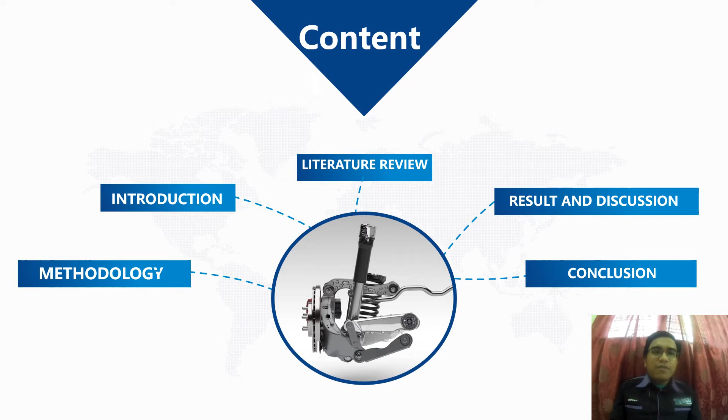For chapter 1, we will look into the introduction for this project. The suspension system is basically a system that includes tire air pressure levels, springs, shock absorbers, and all the components that connect a vehicle to its wheels that allow the car to move.

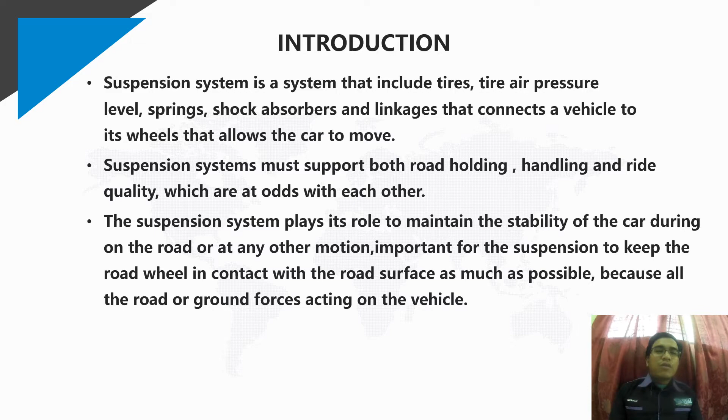The suspension system also plays its role to support road holding, handling, and ride quality, each of which is at odds with the others. The suspension system is also important to maintain the stability of the car during motion on the road, keeping the car in contact with the road surface as much as possible.

Problem statement: the components' condition and functionality of the vehicle suspension system is crucial to achieve sustained comfortability and steering stability during driving. The performability of the suspension system depends on various mechanical parameters as well as human factors. The aim of this research is to investigate external mechanical parameters such as tire pressure, tire width, and load distribution, which could affect the performance of the suspension system.

This research will also help to identify the ideal parameter settings in order to obtain optimal performance of the vehicle suspension system.

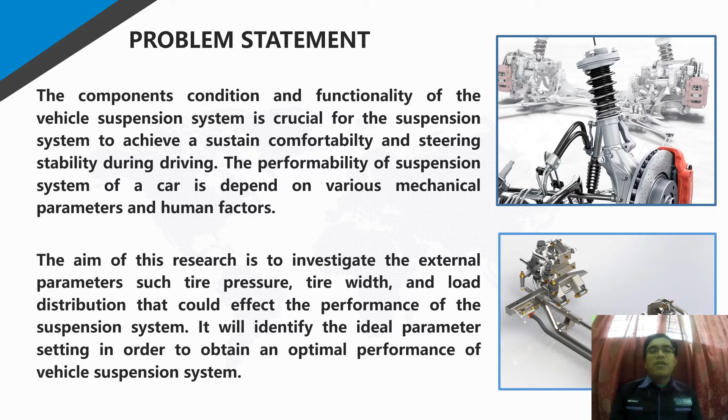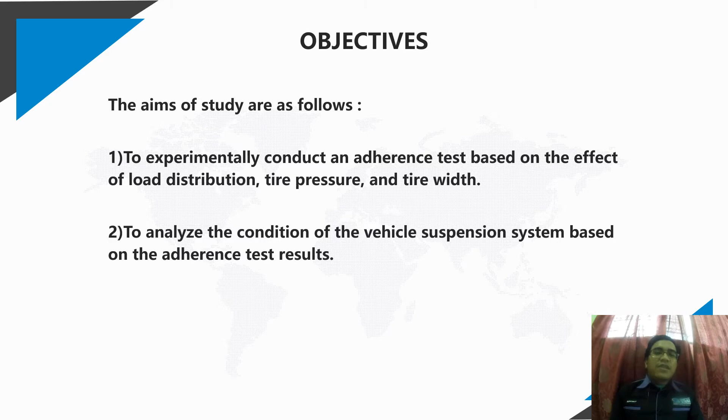The objectives of this research are as follows: first, to experimentally conduct an adherence test based on the effect of load distribution, tire pressure, and tire width; second, to analyze the condition of the vehicle suspension system based on the adherence test results.

The scope of study for this experiment is to focus on conducting the adherence test, considering several parameters involved regarding the vehicle suspension system. This study also focuses on finding the ideal condition and setting in order for the suspension system to perform maximally and with integrated performability.

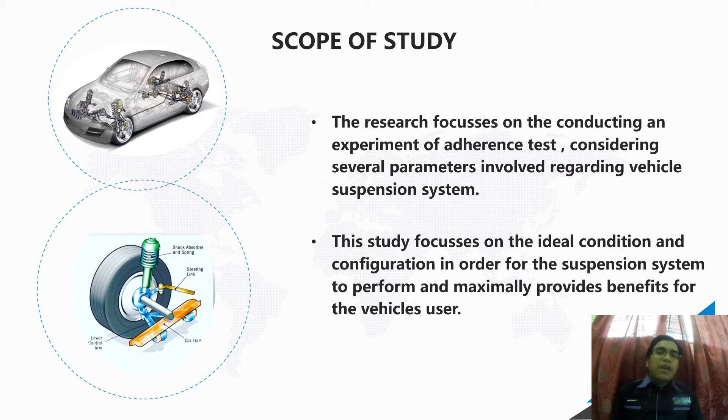Next, we will look into chapter 2. In 2018, Toma conducted a study on the influence of tire pressure on braking performance and the vehicle suspension system. The experiment was carried out using a few sets of numerical data of tire inflation pressure.

The experiment was carried out using a few sets of numerical data of tire inflation pressure. The findings show that tire pressure does affect the suspension ability, creating errors that influence the rolling resistance of the vehicle.

It was also found that tire inflation pressure majorly affects the vehicle's dynamic behavior, which also affects passenger comfortability and can define the tire's reliability. The experiment also gave a result showing rolling resistance as tire inflation increases and pressure decreases. The findings show that implementing a lower level of tire inflation pressure can be considered dangerous.

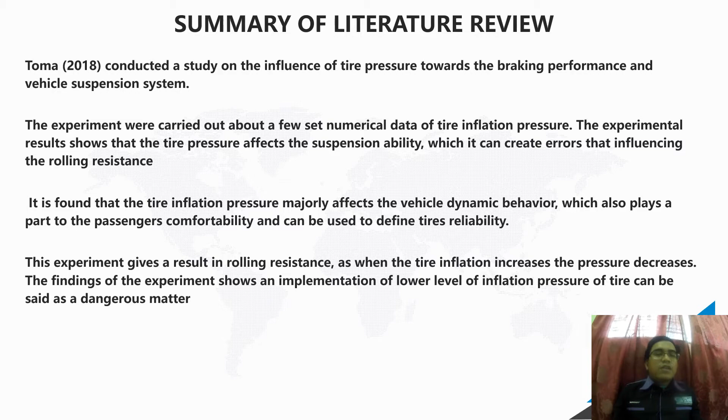Another research was conducted by Hamed et al. in 2010, which states that incorrect inflation of tire pressure influences vehicle handling, passenger comfortability, and braking condition. It is also claimed that the inflation tire pressure being affected contributes to the reduction of fuel efficiency and tire lifespan.

They carried out the experiment using a mathematical model and experimental validation. A 7 degree of freedom model was developed using MATLAB for a full car model system. The experiment was done with different settings of tire inflation pressure, and analysis was carried out for each case regarding the performance of suspension.

Some of the parameters highlighted in this study were road handling, ride comfort, and the stability of the vehicle in terms of the vehicle suspension system. From the experiment, the results show that under-inflated tires do also affect the suspension system performance.

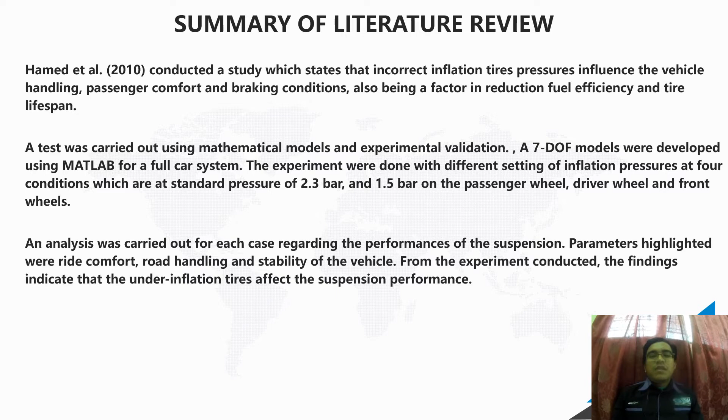Next, we will look into chapter 3 about the methodology of the suspension system.

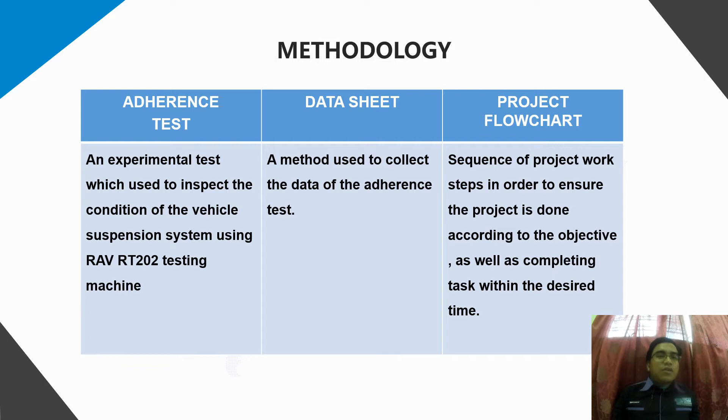In this project we have three methodologies. The first one is an adherence test, an experiment used to inspect the condition of the vehicle suspension system using the RAV RT202 adherence testing machine. Second, we have a data sheet used to collect the adherence testing data. Last, we have the project flow chart, which shows the sequence of project work to ensure the project is done according to the objective and within the targeted time.

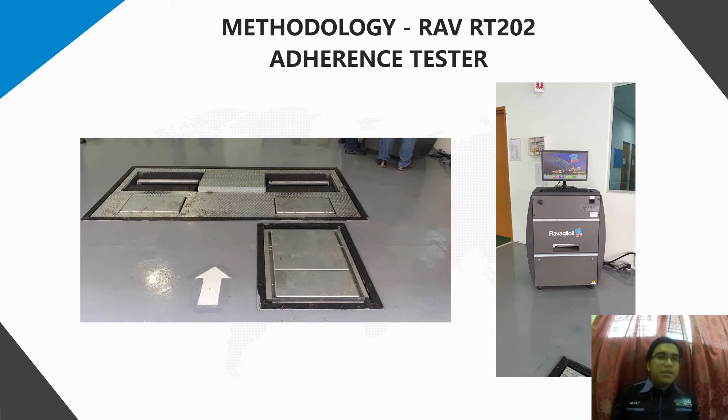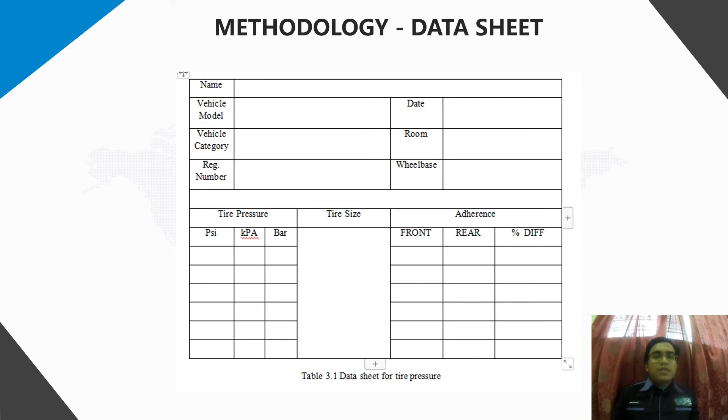So chapter 4, we will look into the result and discussion for this experiment. But first, we will look into the concept of adherence. The value of adherence generated by the test will show the current condition of the suspension system.

If the adherence value obtained from the test is 60% or above, the condition of the suspension system is good. If the adherence value is between 20 to 60%, the condition of the suspension system is considered acceptable. If the adherence value is below 20%, the suspension system needs to be checked, as it is below standard, or the condition of the suspension system may be poor for that part of the car.

This measurement of adherence is measured on a certain part of the car, for instance, the front right wheel of the car.

Next, we will look into the value of adherence difference. The adherence difference is compared between the left side and the right side of a particular axle of the car.

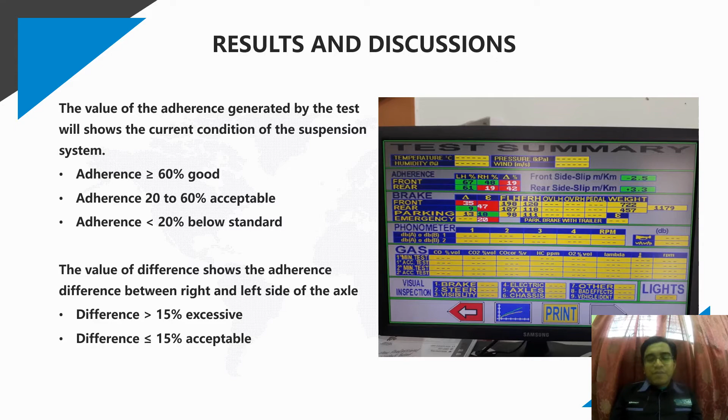Next, we will look into the result and discussion for the load distribution parameter. We have a few different conditions here, and for each condition we measure the front axle weight, rear axle weight, and total weight, then convert the data into a column chart.

From this column chart, we can see the increasing number of passengers mostly contributes to the rear axle weight of the car. The front axle weight is also affected by the increasing number of passengers, but it only shows a small difference in increasing front axle weight.

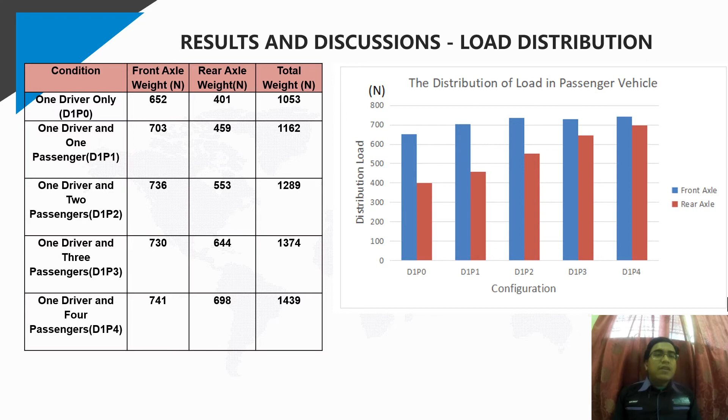Next, we will look into the load distribution that affects the adherence difference. From this graph we can see the adherence difference does increase with the increasing number of load. However, the increasing load did not affect the condition of the suspension system.

This is indicated by the data, in which none of the data measured exceeded the error limit. The error limit is basically the 15% I mentioned before, where the adherence difference must not exceed 15%, or the suspension system will be considered in poor condition.

So here we can see the increasing weight does increase the adherence difference of the axle, but did not affect the condition of the suspension system.

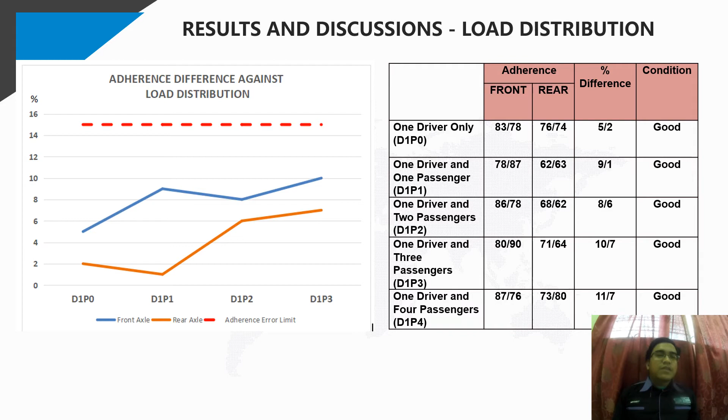Next we will look into the tire pressure results. Here we have a few different conditions of the tire pressure: severely underinflated, moderate underinflated, optimum inflated, moderate overinflated, and severely overinflated.

From the graph, we can see the suspension condition is good when the condition is underinflated or optimum inflated. However, the suspension condition is poor when the tire pressure is overinflated.

Here we can see the suspension system is in poor condition as it exceeds the adherence error limit. So the suspension system is indeed affected by the tire pressure setting.

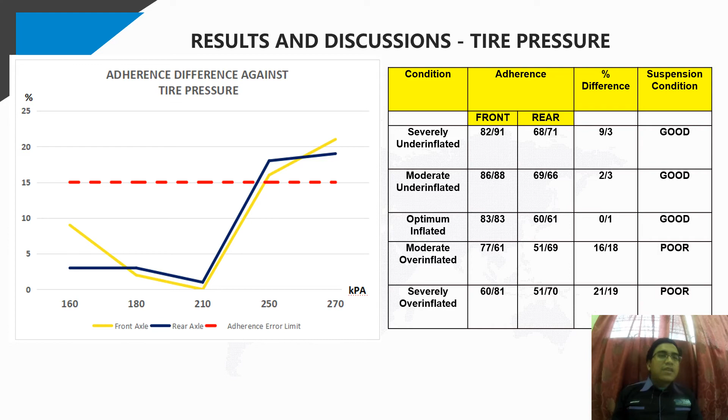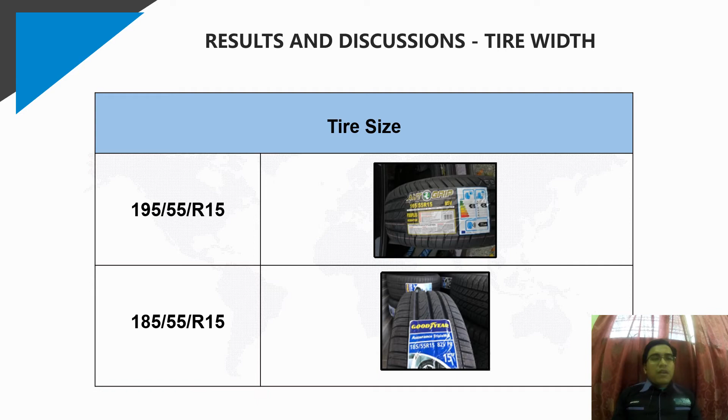So for the next parameter result we will look into in this experiment is the tire width. There are two tire sizes that will be used in this parameter: 195/55 R15, and another size is 185/55 R15.

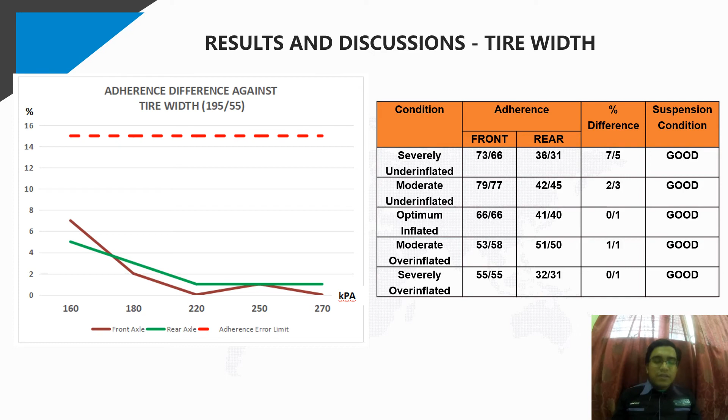Then we will look into this graph about how two different tires affect the adherence difference and the vehicle suspension system. Two different sizes of tires were tested, set in five different conditions of tire pressure. This graph shows the front tire. For tire 195/55, all conditions of tire pressure do not affect the suspension system, as it does not exceed the adherence error limit. However, for size 185/55, it does affect the suspension system condition.

This occurs when the tire pressure settings are at 250 kPa and 270 kPa, which is the over-inflation tire pressure condition. So here we can see tire size 185/55 gives the suspension system a poor condition when it is under over-inflation tire pressure.

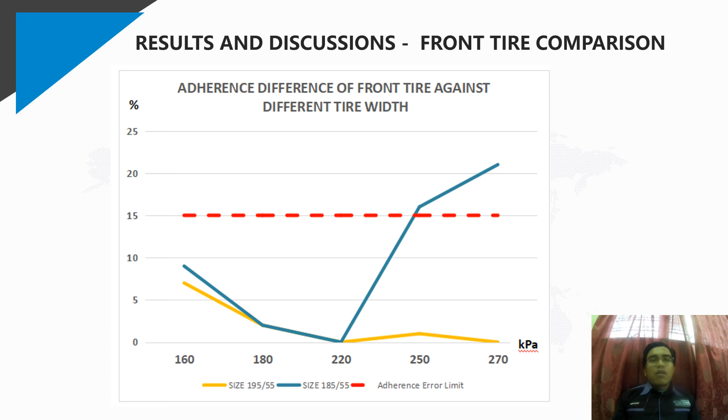Same goes for the rear tire. Tire size 185/55 also affects the suspension system when the tire pressure setting is overinflation. But another thing I want to highlight is when both tire pressures for the rear tire are at the optimum tire pressure recommended by the manufacturer, 220 kPa, both tires show only a small amount of adherence difference.

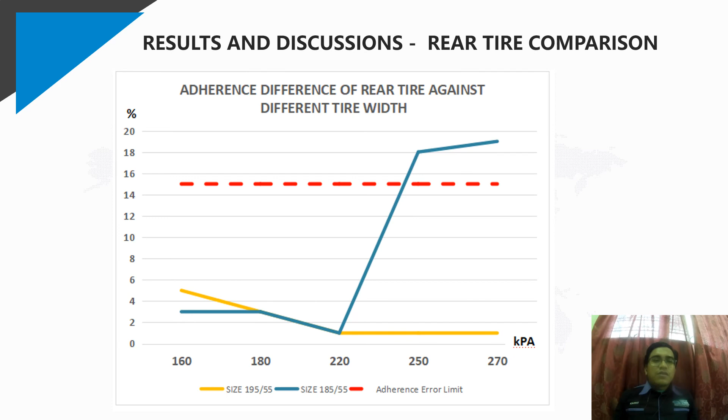So we will jump into chapter 5 for the conclusion.

As for conclusion, the load distribution findings show that increasing the number of passengers will increase the axle weight drastically. The front axle only shows a small increase in weight, although the passengers in the car have reached the maximum limit. Therefore, we can say the weight of the car increases mostly at the rear axle. The load distribution does affect the adherence difference of the car, but did not affect the condition of the suspension system.

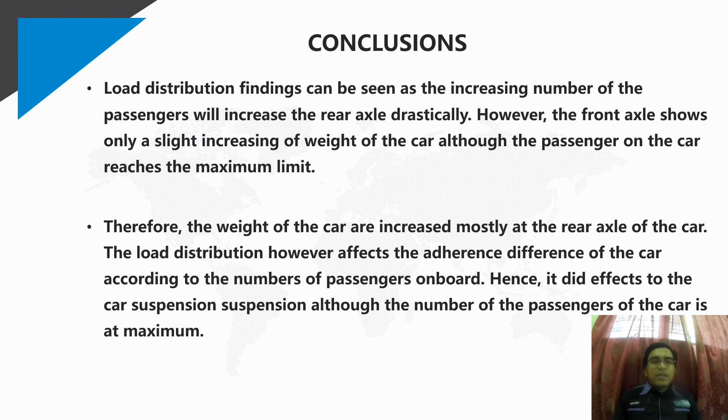Next, the tire pressure parameter. We set it into three different conditions: over inflation, optimum inflation, and under inflation. The tire pressure shows adherence difference permitted within the error limit when set for overinflation. Both front and rear tires show the same outcome when tires have excessive tire pressure. Underinflated tire creates a small adherence difference, but optimum inflation gives a better outcome on the adherence reading, and also affects the suspension system. In brief, optimum tire pressure is the best setting for the tire, and it is also recommended by the tire manufacturer.

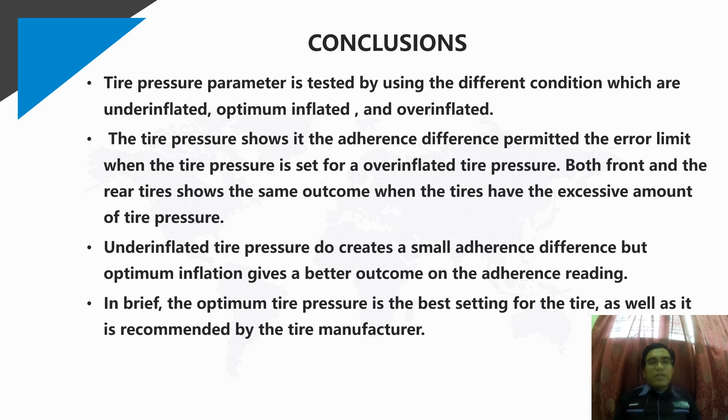Next, for the tire width parameter, it shows a different result as the width of the tire is increased in this experiment. The underinflated tire pressure condition gives a slight adherence difference measurement, while optimum inflation and overinflation show no effects on the adherence values. We can see this on both front and rear tire for tire width 195/55.

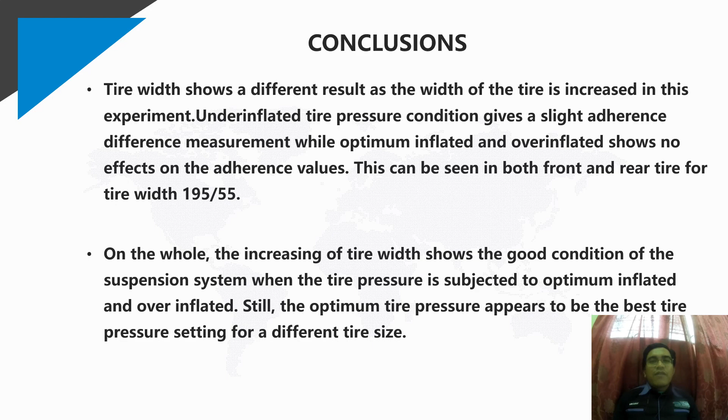Overall, the increasing tire width shows a good condition of the suspension system when the tire pressure is subjected to optimum inflation and overinflation. But still, the optimum tire pressure appears to be the best tire pressure setting for different tire sizes.

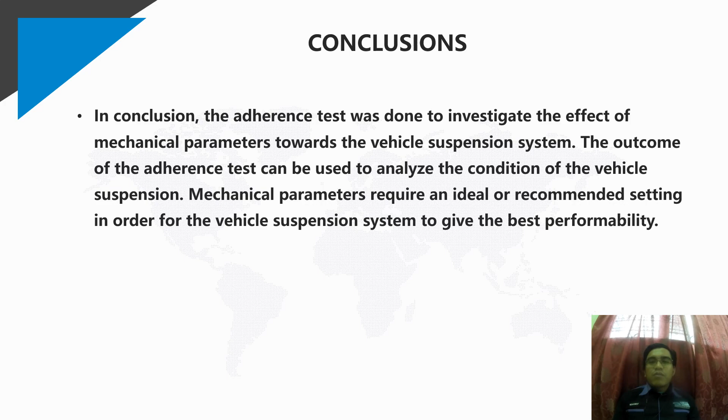So in conclusion, we can say that the adherence test was done to investigate the effect of mechanical parameters towards the vehicle suspension system. The outcome of the adherence test can be used to analyze the condition of the vehicle suspension. Mechanical parameters require an ideal or recommended setting in order for the vehicle to perform with great performability.

And that's all from me about the adherence and the vehicle suspension system. Thank you.